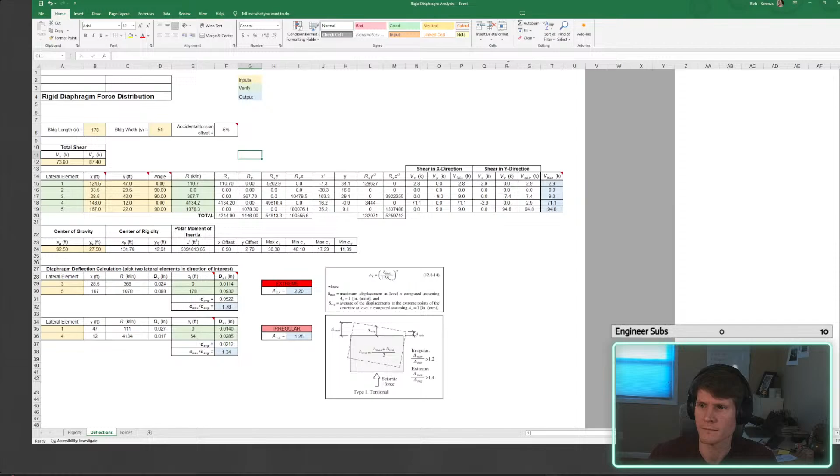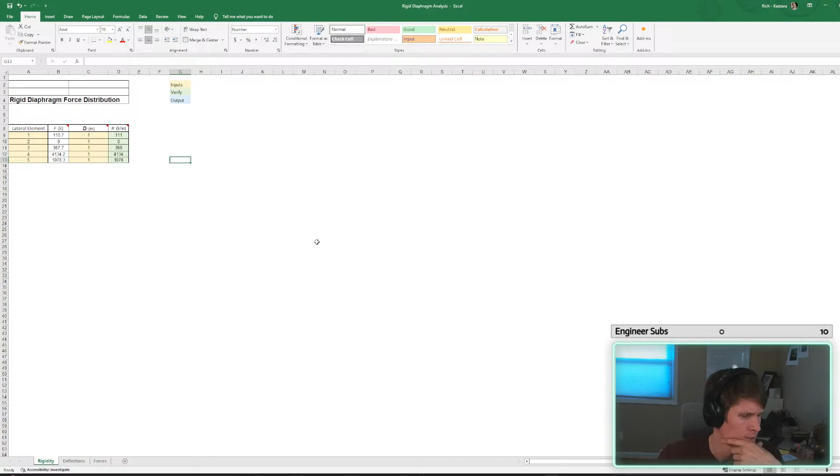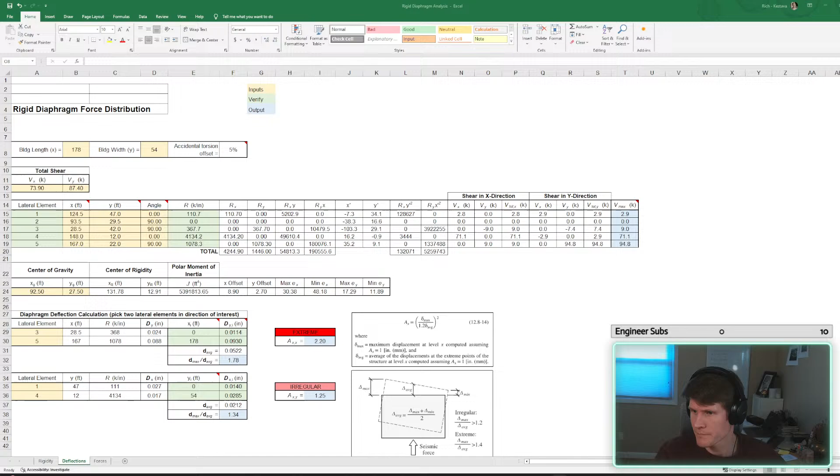All right. All right, let's get this over. All right. Trying to think here. So I have a case that I'm working on. Let's head over. Alrighty. Oh. I'm going to be back and forth all over the place here. All right.

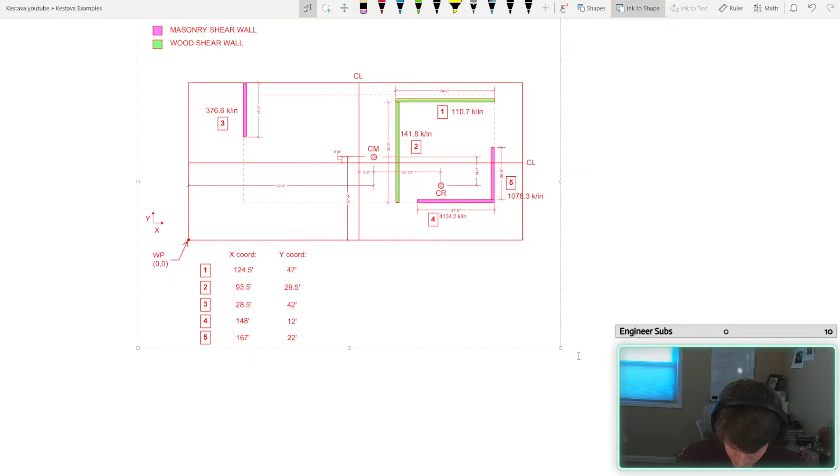Not gonna lie, I don't know what I was thinking almost drawing that. Let's just bring in the info so we can get to work here. Okay. All right, so that's our case. Stop chucking you all over the place. Okay. That's our walls, that's our stiffnesses, although I am going to update those stiffnesses. I was running some numbers yesterday, and I actually want to update them.

Because the green, as you can see, is wood walls. For this analysis, because the others are masonry, their stiffnesses are so significantly less, I'm actually going to exclude them from the analysis, because I'm going to run both a rigid analysis and a flexible analysis, and then envelope the procedure and design that way, because mass timber is what my design is.

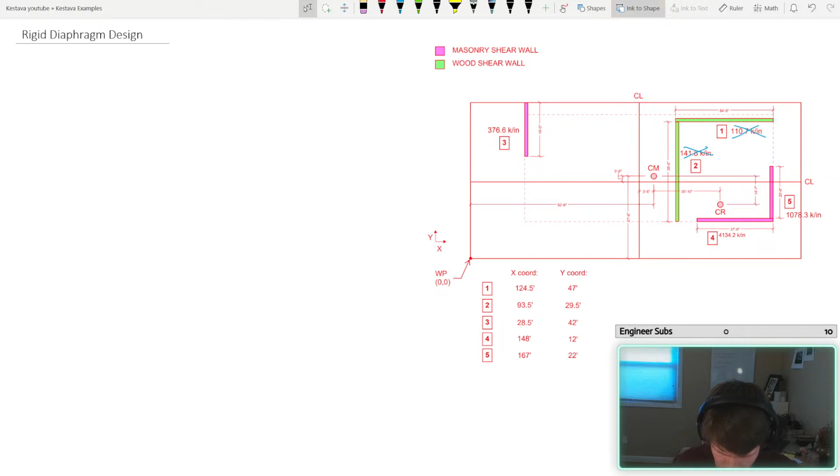Shoot, this is a previous saved version that I didn't want to be using. Yeah, this isn't what I want. Let me grab. Stand by. I'll be right back to you. I actually just need to grab the other file off of my thumb drive. I'm here with you in spirit.

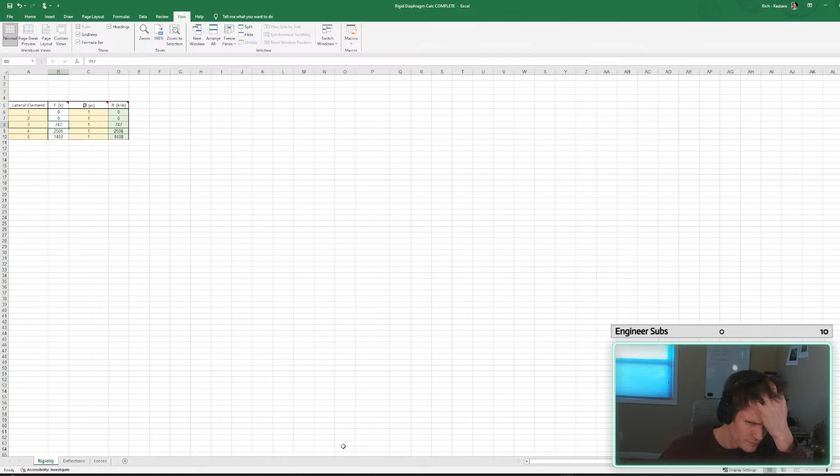And we're back. Okay. All right, so this is the one I've updated. And I need to tweak a little more. All right. So, let's remind ourselves. And did I input my new stiffnesses to this? So, like I said, we're gonna go 0, and we're gonna go 0. Okay. I believe I did. These are updated. Okay, so this one is actually 747. This one.

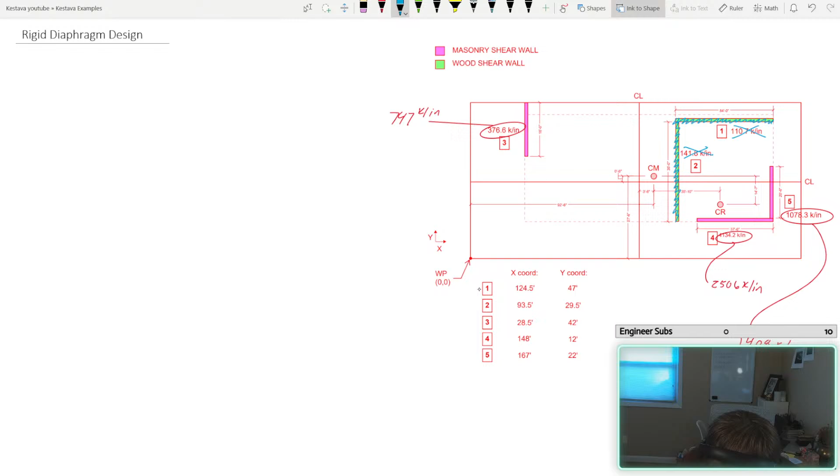Actually, one of the things that we're going to look at later is converting. If we're getting some torsional irregularities, let's convert this to masonry and see how that helps.

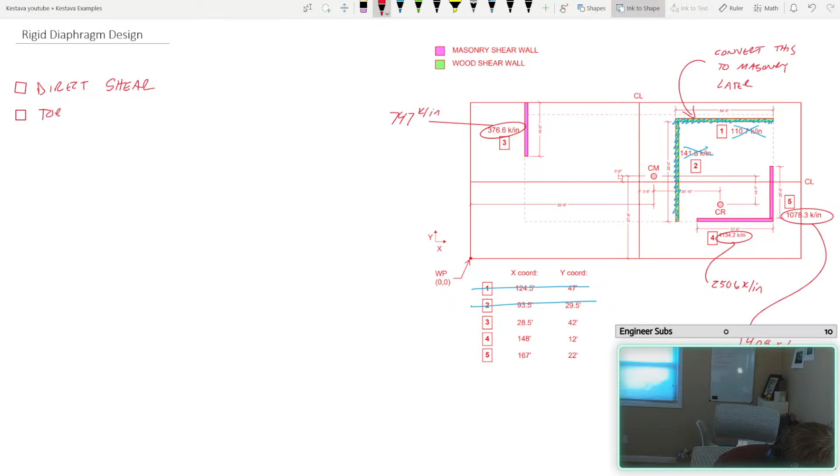Huh, cool. All right. All right, and just like that, that's no longer going to be used.

All right, this method is only good if you have two walls in a direction. So if I have multiple walls in a direction, how do I find my rigidity? Still, we'd be basically finding like your center of mass for an object. I want to say still the same equation. We basically need y bar and x bar for rigidity. So I think I could just use the same logic. Let's find out.

Starting from a work point, that's going to be our big key here. It's going to be rigidity and a distance. Otherwise, it would be a mass and a distance when we're trying to find the center of mass. We're finding rigidity, center of rigidity, and distance. Okay. So we have 747.

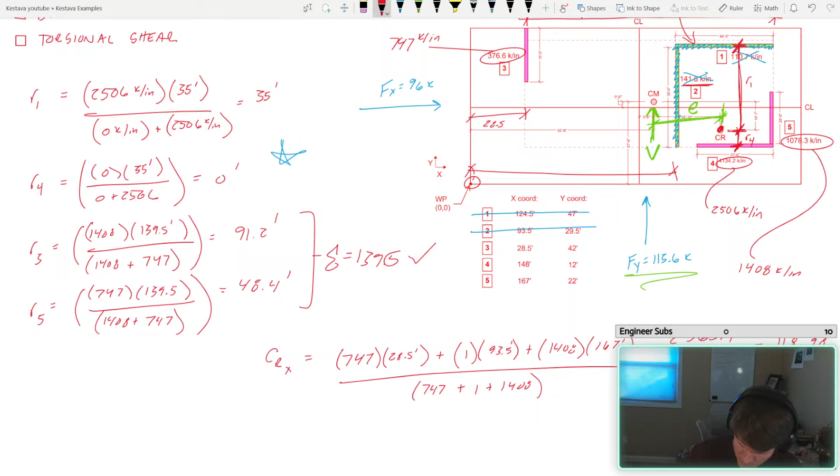All right, we're in business here, so beautiful. That matches with what we had. Spot on, spot on. All right, so that's how, got it. Okay. This all makes sense. So we're

taking this. In order to find the x component of our center of rigidity, we're taking the rigidities in the y direction, which we're denoting as big RY, and multiplying it by their x distance. Yes. Yep. We're summing those, and then we're dividing by our total sum of our rigidity in the y direction here. Good. Excellent. Okay, so that's running smooth.

This should be doing the same thing, only for our x components. Good. That yields our center of rigidity, which is great. All right. That clears out. Maybe we go across here, and we're gonna flag these with some green to know that we've cleared through. So these are good.

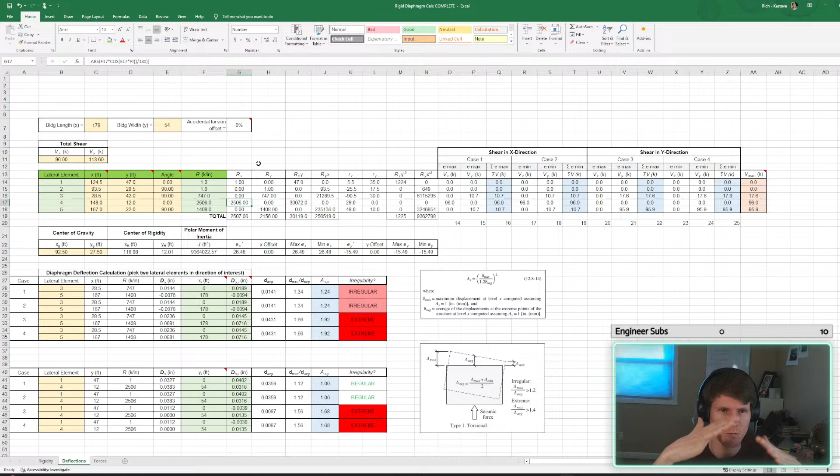That's it. Anything else beyond that, we're going to be modeling stuff. We're going to be jumping into ETABS. So don't think that I'm trying to build cases where you can do weird angled walls or lateral elements in places. That's going to be a little too complex for right now.

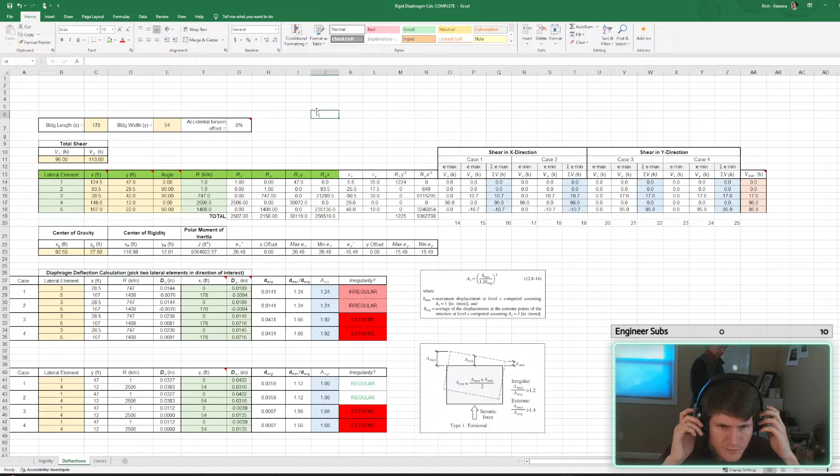All right, quick second. I'm just gonna grab some water. Be right back. I suggest you do the same, everybody. Head to that water fountain, not all at once. Don't run. You can run in here, whatever. All right, be back in a second.

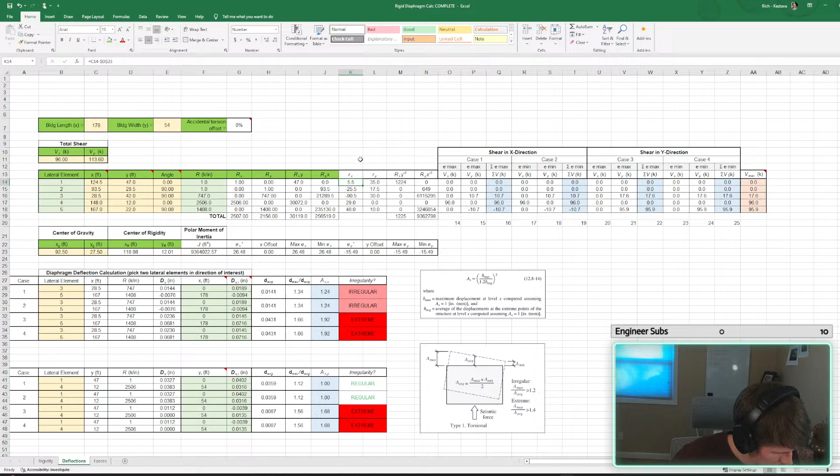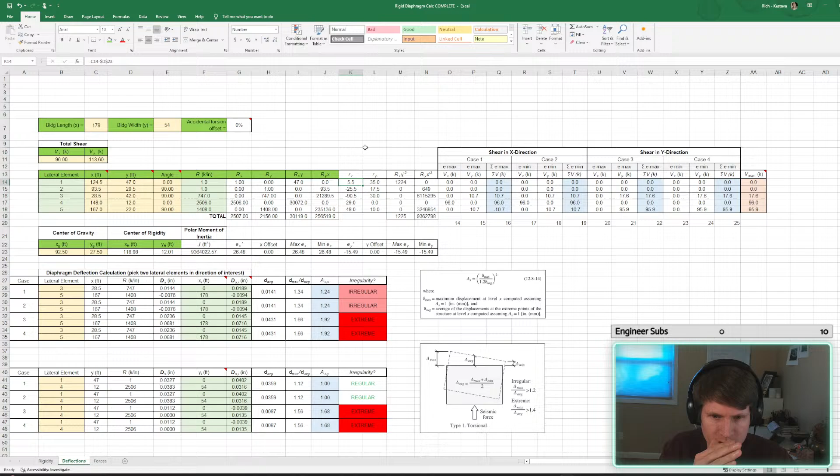All right, my question to myself before was, does the direction of the distance from the center of rotation to our lateral elements need to be properly located with respect to the center of rigidity in terms of positive, negative? Like if it's here, if I switch back, just talking out loud here.

If our center of mass is here, center of rigidity is here, with walls, so that means this is going, because this would be applied here, which is going to create torsion. I don't think that this value needs to be properly located, especially since I know our next equation, J, takes our little r's and squares them. So that wouldn't matter if it was a negative value.

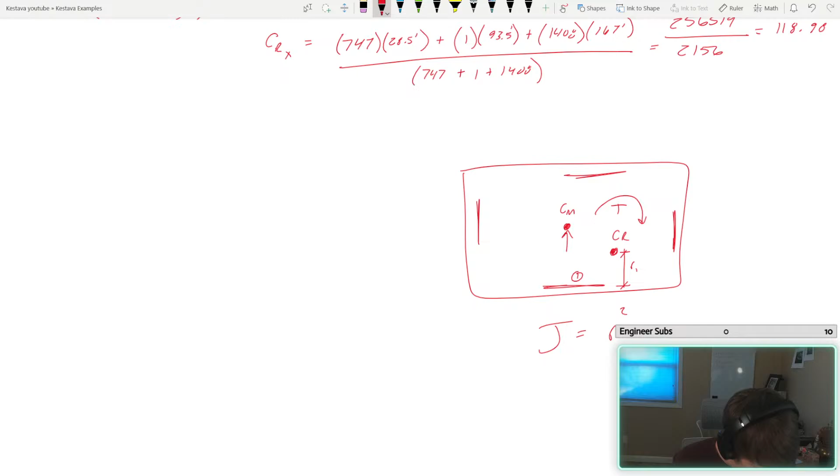But afterwards, our force per wall, our direct shear doesn't matter. It's V R i over summation R. Okay.

So by that value being positive or negative, will that influence things?

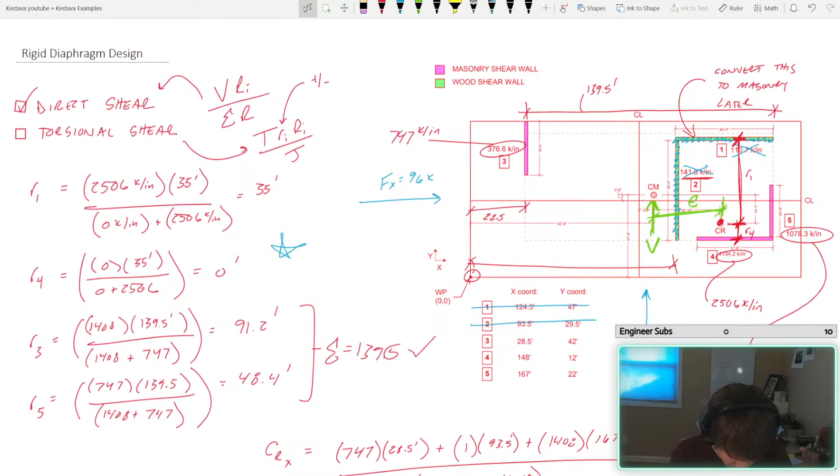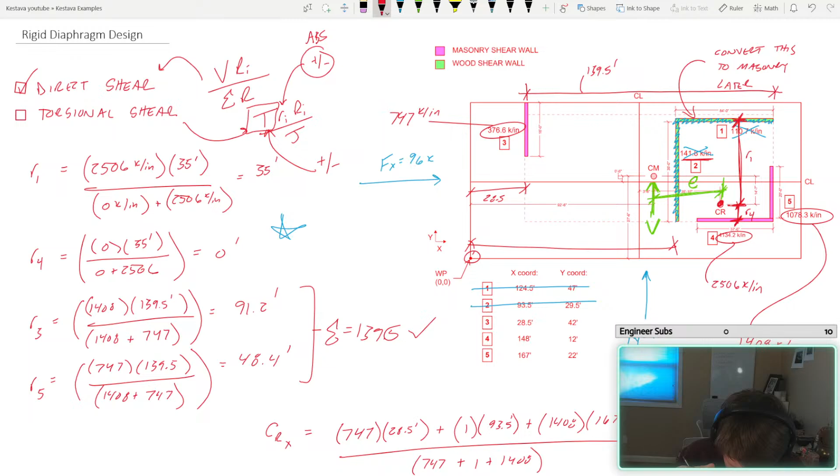Oops, stay up here. Okay. I guess if this stayed positive, if we make sure that our torsion is designated directionally, would that appropriately feed? Let's get into it. Let's figure it out with numbers. All right, so I'm gonna start by absoluting all these.

That's a good question. Unfortunately, right now, I need to focus on this, but that's a great little PE question that I could get together, but I'm guessing that's gonna take too long for you.

Single angle, bending. What load? Gosh dang it. Okay. Boom, and you're saying this thing is fully fixed, both ends. Then you're saying, I guess the load is gonna be pretty close to the inside. Not like so. Oh, not centroid.

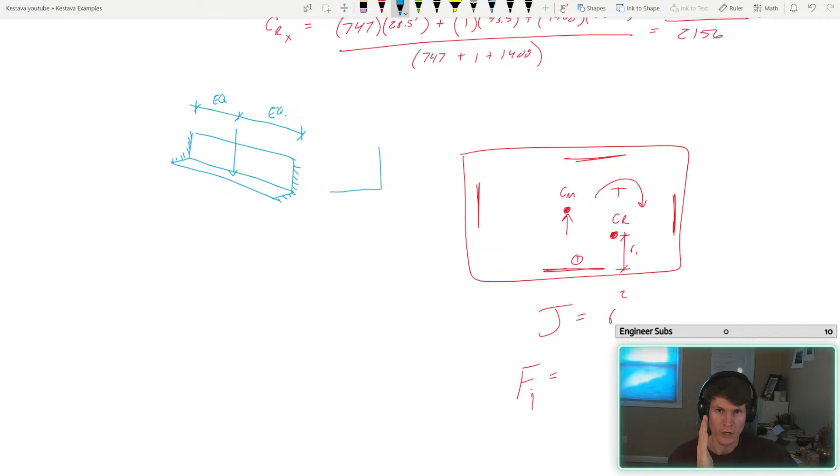Where did those equations for bearing pressure come from? I actually, way back, I don't know if I did it on my channel. I think in my earlier engineering days, I actually back calced how they derived those equations. If you break them apart, it's based on assuming the kern of 1/6 and taking your resultant load. You can back calculate and derive that equation. I know it's like, duh, thanks. How did they make the equation? They derived it.

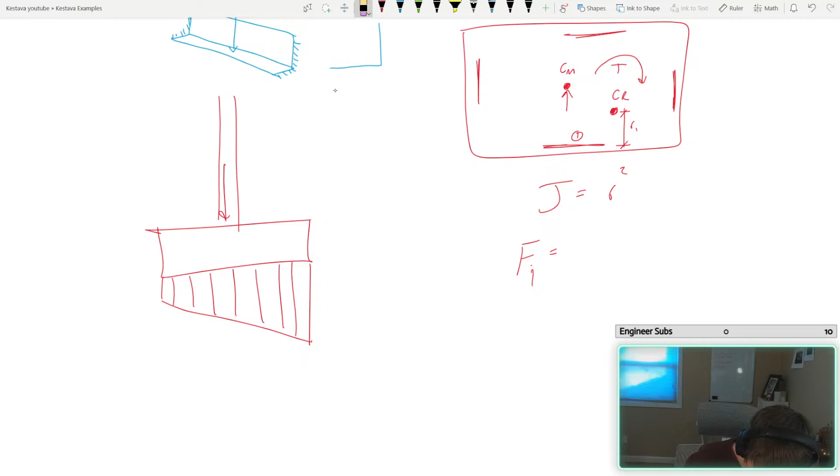But those bearing equations basically are calculating how much surface area we get to. Why am I talking? I got this in front of me. Basically, it's a function of, if we're in this state, we're looking good, but as we get more and more... well, if we have no eccentricity, then it's just like this. So your P, and M equals 0, so you don't have any moment, which means that your resultant's eccentricity is equal to 0. So your resultant is directly underneath your P, which means you get an even distribution of bearing pressure.

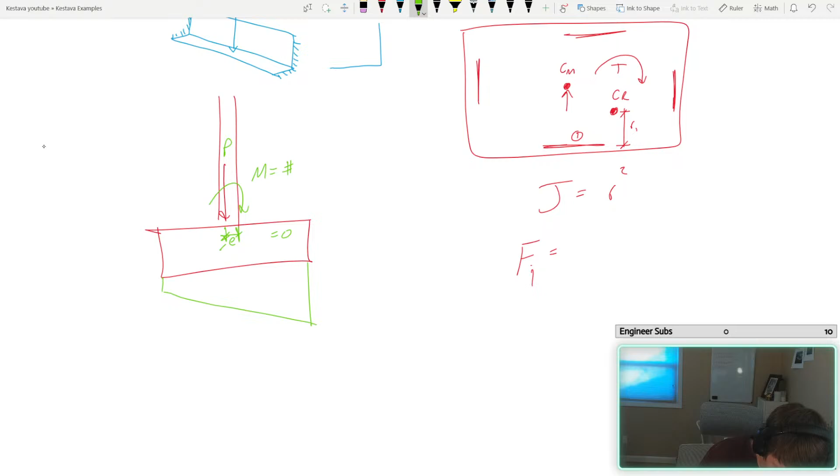But if there is some amount of moment, there will be some eccentricity, which takes you to the next step. Oh, and that first bearing pressure is just P over A, the A being the surface area of your footing in contact with your grade. So that's a really simple equation. I know it's easy, but Q max, we just derived an equation.

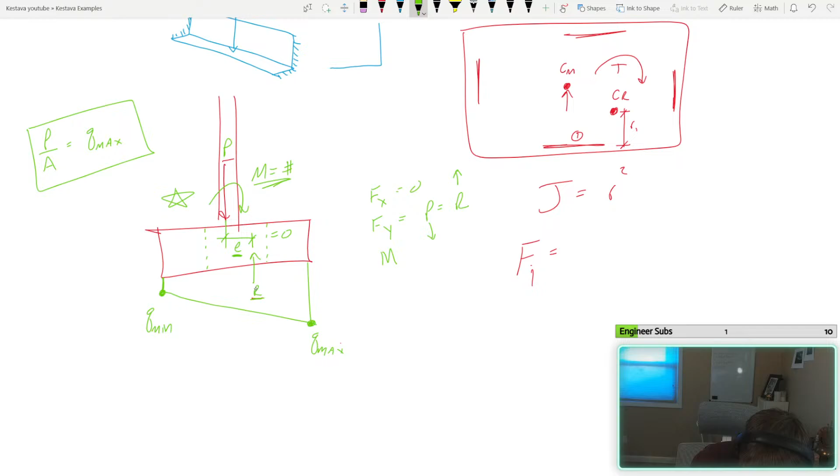And depending on your kern, or how far this eccentricity is, you can calculate this Q min value and this Q max value. This whole thing is a summation of both of these equilibrium equations. This one is just the Fy portion, which is just P over A. Then you have this going on, which is essentially your M over S equation. If you add those together, that gets you a resultant that looks like that. So you could just say Q max is equal to P over A plus or minus M over S, to get you Q min if you subtract, and Q max if you add.

Case closed, right? We just derived another equation to use. But you're like, hey, that's not the one that I'm prescribed to use. Mine has the 1 minus 6e over B and blah, blah, blah. And you're like, what the frick? Well, that's because if you play around with numbers, eventually, depending on your eccentricity, this equation breaks. If your eccentricity gets too large, this no longer works.

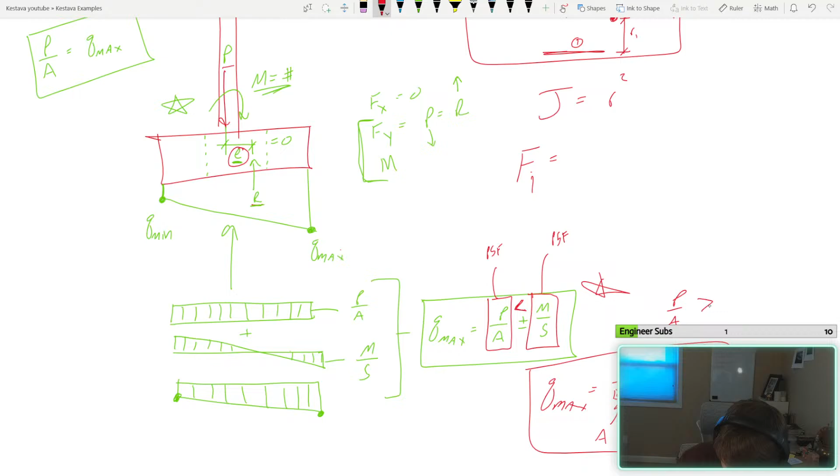But that derived equation basically says, okay, we know that this works in all cases. It works when P over A is greater than M over S, and it also works when P over A is less than M over S. So just use this frickin' thing all the time, then you don't have to worry about it. And then subsequently, it goes even further.

They say, well, eventually, when your eccentricity is so bad, your bearing pressure now looks something like this, because your resultant is way over here, because you have a very large M. Now your eccentricity is popped way out here, so you don't get to utilize all of your footing for your calculation, because theoretically, this portion of footing is experiencing uplift. It's starting to rotate, and soil doesn't have any tensile capacity, as we know, so it just doesn't do anything.

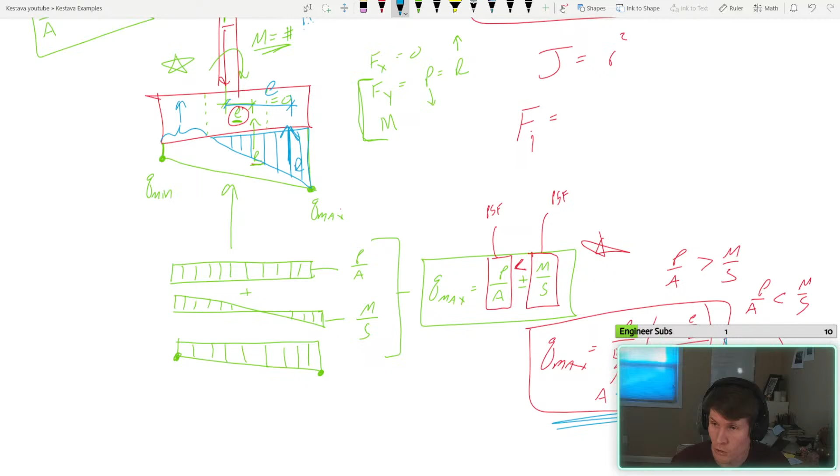And in this extreme case, this first equation, this might not be right, so don't hold me to this one, no longer works. Well, when does it no longer work? It no longer works when you can no longer utilize your full footing area. So once Q min is less than 0, when it's a negative number, you're flagged and, oh shoot, I need to use the new equation for Q max, which is the 2P over 3 B e prime something.

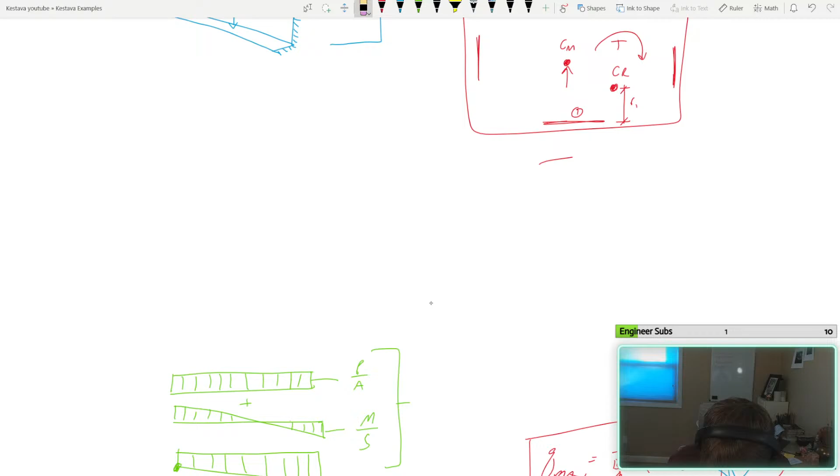And then Capital Bricks just comes in here and he's like, dog, Q min, chef's kiss. In case you wanted to know. Appreciate it, Capital. All right. Frank, I hope you're still there. If that just was a wild ride, just let me know. It's my bad, man. But we're gonna get back to it. That was a half-hour excursion. But that was fun. All right. Nice and clean. Get the angle out of here. Not that I'm hating on the angle, I like that question too. That was cool. Oh, Frank is here. Let's go.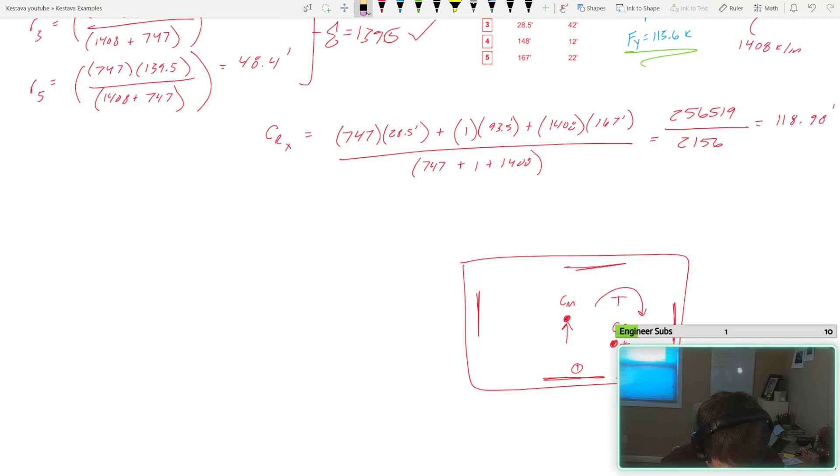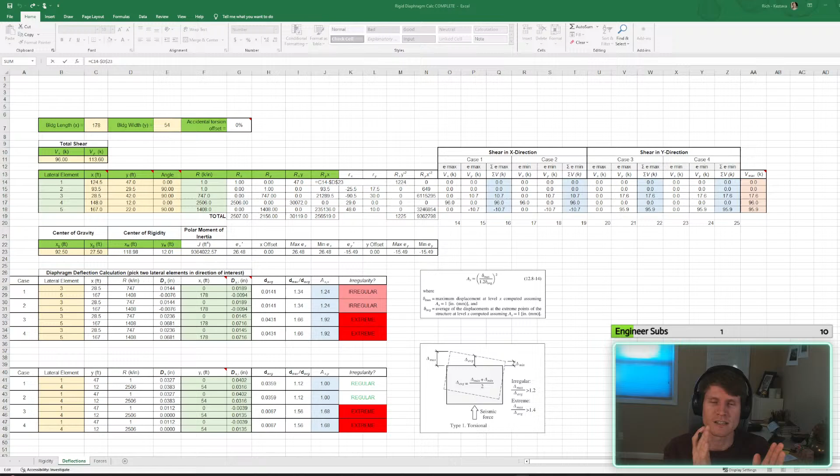Hey, no problem, Frank. I know it was fast. We were on the edge of our seats in the auditorium, but hopefully those equations made a little sense. You can actually derive them if you sit down, play with the numbers, make a little Excel spreadsheet, and see as you mess with your axial load and your moment on a footing, and mess with eccentricities, what starts to happen to all of these equations. You'll come to the conclusion on how they derived these.

Those ones are, in my opinion, kind of fun to derive, whereas there's other ones where I'm not some mathematician wizard that's going to sit in an ivory tower for 15 years to get this thing derived and figured out. Are we in the jungle?

All right, so we're back on it. What I'm going to do, I'm going to switch this up and make these values absolute and say that we don't care about their direction. It does move things around, which I get scared about, but our polar moment's always going to be positive. Yes, our polar moment's always positive because these things are squared, so that's fine. Let's absolute this as well.

All right, yeah, and I've split. I do want to do this. Oh, I'm forgetting how to do a sub. Where's my sub number? Could just do this. Ah, no.

My 4 cases are center of mass, center of rigidity: Fy with eccentricity plus accidental, that's a case. Then I have Fy with eccentricity minus accidental, that's a case. Then I have Fx, eccentricity plus and minus for 2 more cases. For 4 cases total. So that's what's going on there. Before, I had them all combined for how load was getting to my shear walls, but I want to actually break them up now into direct shear and torsional shear.

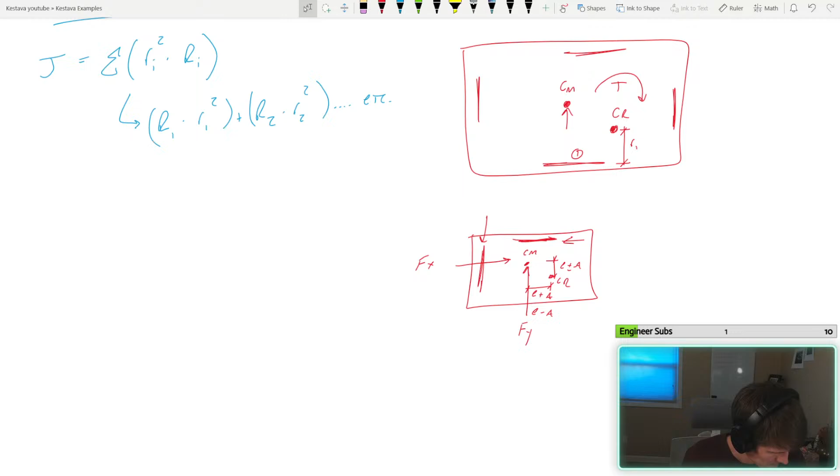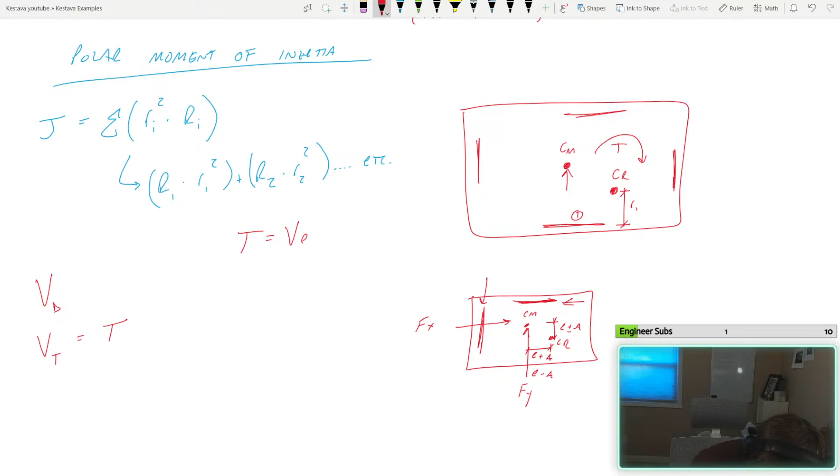Okay. So V direct we'll do, and then we'll do VT for torsional. It's going to be your torsion, and we know that torsion is equal to your shear times your eccentricity plus minus your accidental. That in there like that. Your V is simply these guys depending on the direction you're looking at. Okay.

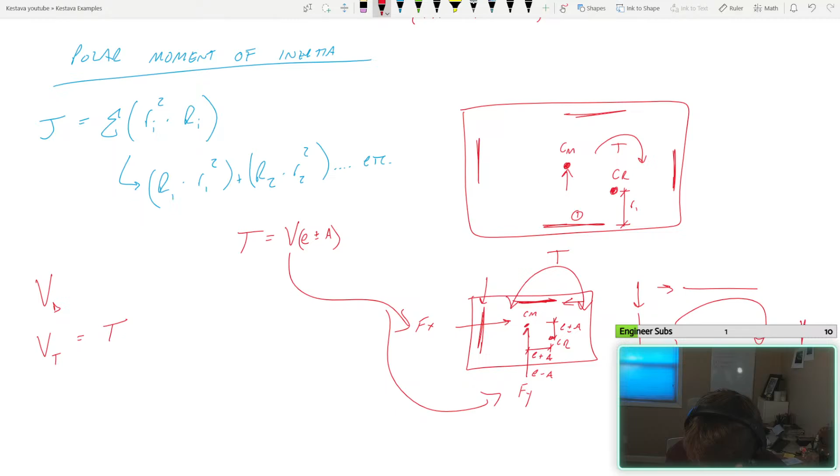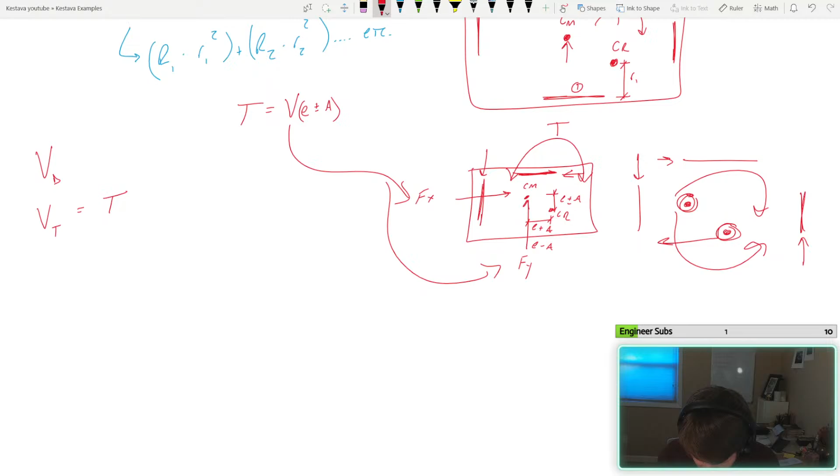And again, the direction of your torsion, is it doing this or is it doing this, is important to distinguish which direction your torsional moment is actually loading your walls, which is going to affect your displacement, which is needed to calculate your irregularity checks. So I need to be aware of tracking, as cases change, where center of mass is relative to my center of rigidity. I keep drawing in front of my big head. Okay. Okay, so case 1. My shear in the X direction.

That honkin' equation, that's both my direct and torsional shear added together already. So I need to break that out. And I'm doing E max for case 1, which is E max for shear in the X direction, which is my EY. Yes, my offset is 0 because it's accidental. So my max eccentricity and my min eccentricity are the same values. So that's working. If I add my 5% like you should, yes. And then it adds it and subtracts it. Okay, good. I think that's running. But let's keep it simple for now so then we can complicate it later.

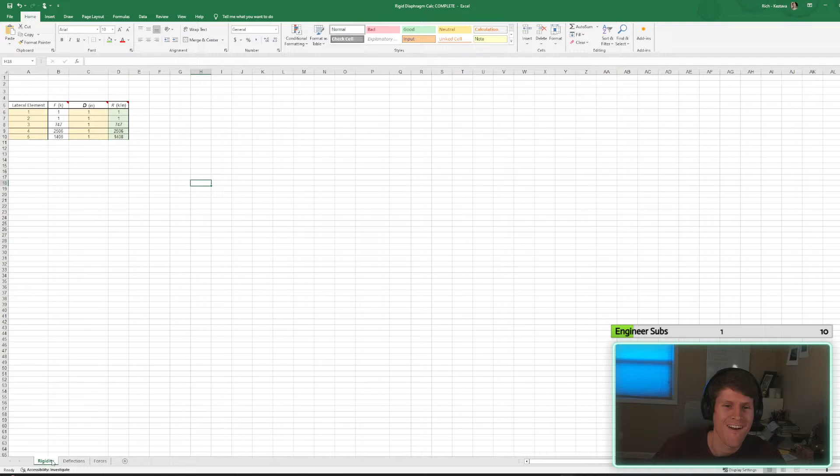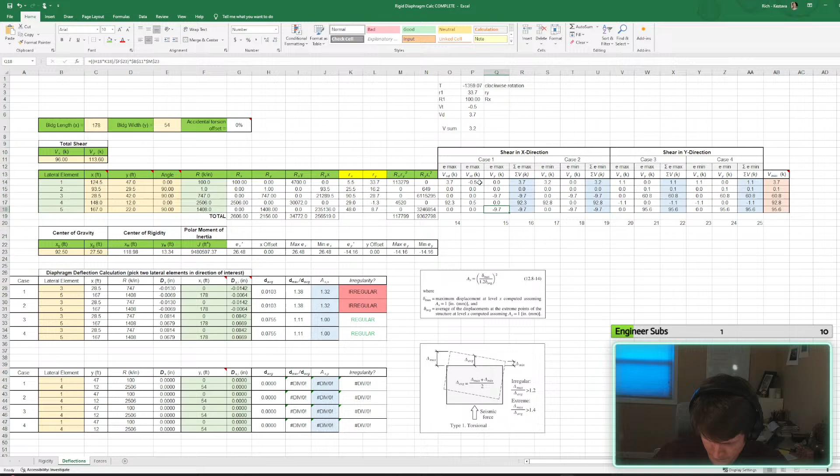I got a little something going on here. It's exactly why I wanted to spend more time and break up my direct shear and my torsional shear. Yes. Okay. But yeah, exactly. Someone in here knows what's going on. Because what I need to make sure of is how I'm applying it directionally, torsionally. So if that's happening, they should be flipped. This one should be additive, which means that my absolutes should go away then. Oh, that didn't fix it though.

And then the opposite, I want to do that's positive with respect to my axes. I'm keeping everything with respect to my axes, so like down here, I'm taking the key thing here. Again, it's a simple spreadsheet that I'm trying to use here. It's limited.

Like here, the big thing is that this is my origin. So this whole thing is built off of that. And I have my x-axis and my y-axis, and anything moving up is positive. Anything moving down is negative. Same with here, plus, minus. That's where I'm playing around with these minuses, negatives, and positive values.

And again, it's all, oh, no, you don't. It's all about tracking my center of mass and my center of rigidity as they move around and as they swap and move with one another, as we mess around with your system. The negatives and positives need to keep up with that because it's going to change the direction of your torsion, which then changes the directions of torsional shear applied to your walls.

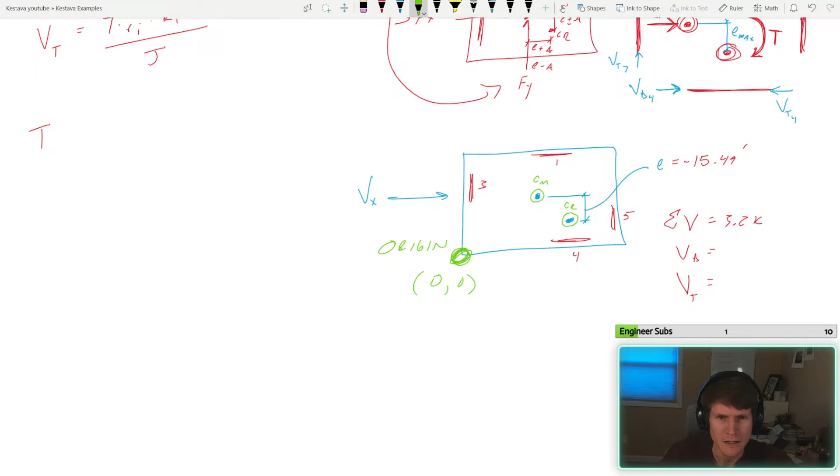Okay, let's go back. Max is this, and min is this. If I put some value in, shoot, so these gotta swap. Because it's, okay. Its offset isn't that much. Which now I think I can say negative and positive. Yes, and this one is gonna be positive and negative. Yes.

This would be the same thing. Negative, positive. I flipped these. Yeah, I caught myself. I needed to start from the beginning is what I needed to do. Which is what I did here today. Good. That's all running nice now.

So you do like me speaking my thoughts while I'm doing this? Because I am happy to. I just don't want to drive anybody insane. But yeah, I think this is pretty cool. I do enjoy doing it. Okay. Good.

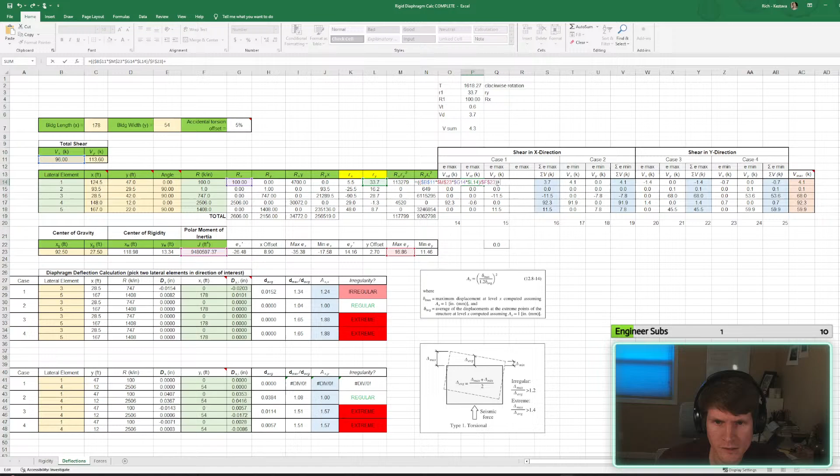My torsional. Yeah, so what do I do here? Do the same thing. Yeah. We are literally gonna package this guy up. Package this guy up. Plus all of this. But we need to do some maintenance now. This needs to be H. And this needs to be K.

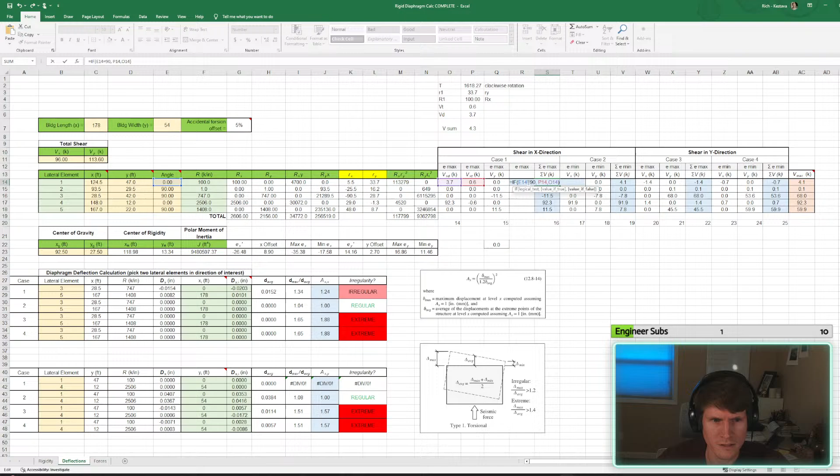So again, if that were to change, did that change? Yeah, it does. Barely, but it does. Okay, good. All right. That's sum of directional. That's a sum of torsional. So now I actually don't need these cell blocks. Summation's going to be if this equals 90, then, wait a minute. Oh, because they're combined now. Yes. This can just equal sum of these two. Okay.

Okay, okay. Why you gotta be like that? Okay. Delete these. That X can go away now because it's just the total, which is beautiful. Cleaning it up a bit. Summation of Z. Okay. Yes. And then we could do an equals sum of all of these. And then we can put a type parameter or conditional formatting. What do I want to do here? I want to say this.

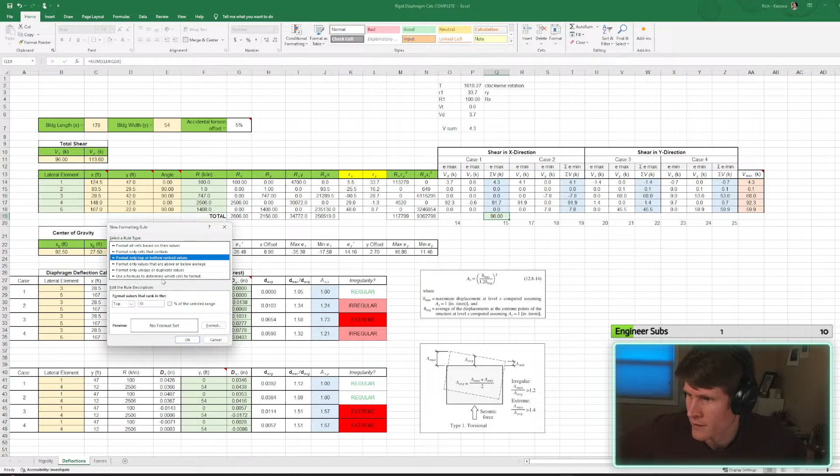If I do this, it changes to, oh my God. Jesus Christ, that's Jason Bourne. All right. Okay.

Duplicate values. Format values above or below average. Format it if it's equal or above. So not that one. Format only cells that contain. I think it's this one, right? Because then we can go cell value, not equal to. Cell value? And then what do you do? This and do this, and then format it. So if it's not equal to that, then it's going to be red. Like that. Let's get rid of these. Delete, delete, delete. So now if this is 1, oh my God, 100. Let's go. All right, we're rolling.

All I want to do is, I feel like this is a little harsh. Can we outline? Can I do a color outline? Do something like, oh, Jesus. There we go. No, let's do that. Outline it. The fill. Clear it. Border, font. Yeah. Okay. Oh, yeah. Let's go, team. Oh, the last thing with that. This is not equal to. It applies to that. Oh, shoot. Okay, B11's locked. Okay.

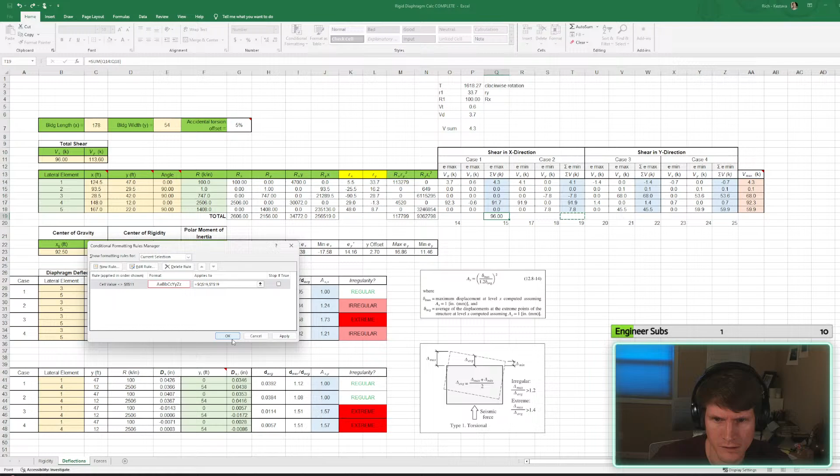Can I switch this? Can I do a swath of these? This, comma, 1, 2, 1, 2, this. Why? Yes, so if this is 96, otherwise if this is 1, yes, okay. All right, Clint, appreciate it. Yeah, that's a good point.

I want to keep going with this, but I have to log off here, unfortunately. We've been here for a long time. I'm gonna pick this back up tomorrow. I think we're close to the end here, which is nice. Now that I have this case figured out, I just need to convert it for this direction and then for those directions. And then that should be running smooth, and I should be seeing what I want to see. So that is great news. So I'm going to hit save. Let's flag what we have done so far. This green. And we go from there. Yes. Okay.